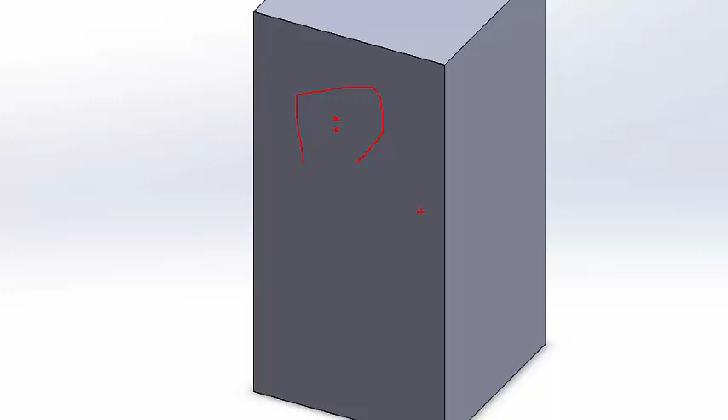Okay, welcome back. Now we are going to add additional features to our base rectangle that we made in the previous tutorial. So what we're going to do in this tutorial is we're going to make the traffic lights shield, the two holes for the LEDs, and then we're going to make copies of them down.

So we put all our work into one light cover and extruded holes. And it's like copying and pasting. And that way we will end up with all three, but put all our work into one.

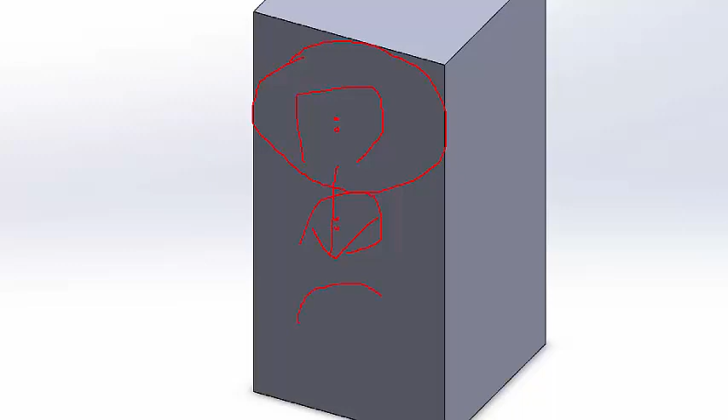Okay, so to do this, what we're going to do is we're going to start with an extruded boss base. Like mentioned before, you never start at the sketch level unless all you wanted was a two-dimensional sketch. We're going to click on the extruded boss.

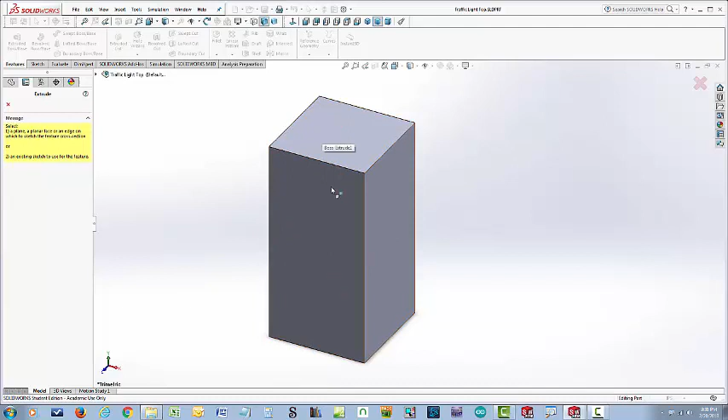This time it doesn't show us planes. It expects us to pick some part of our part. So we're going to choose the front face.

Now when we start sketching on here, we want to choose the front view so we're looking on it straight on.

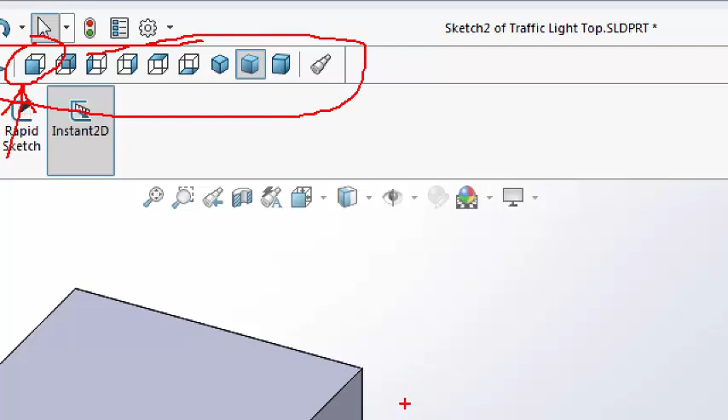So if you don't have this toolbar, what you need to do is when you right click up here, you will then see this menu come down, and the one you want to click is standard views. So if you click that, you will end up with this toolbar here.

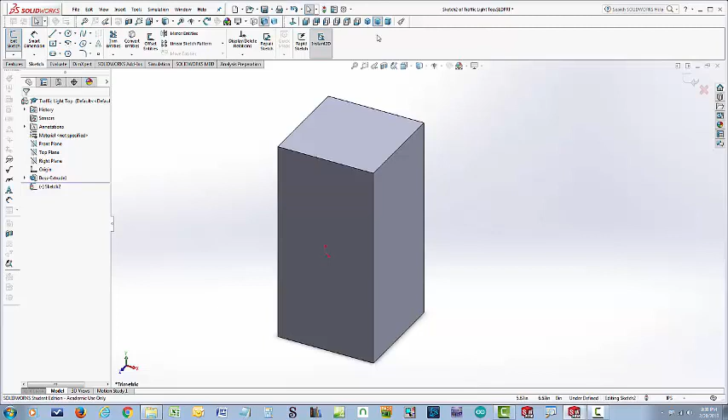So I'm going to click the front, so I'm looking on it straight on. Now I'm going to be using

a center line as a construction line. So I have to click here for the drop down menu because the default is the line, but I want to use the center line. So I click here, drop down menu, and I'm going to select center line.

With that active, I am now in the sketch. I am going to go over here to the, because we created the part at the origin, we now have the origin of our XY axis here in the middle of our part.

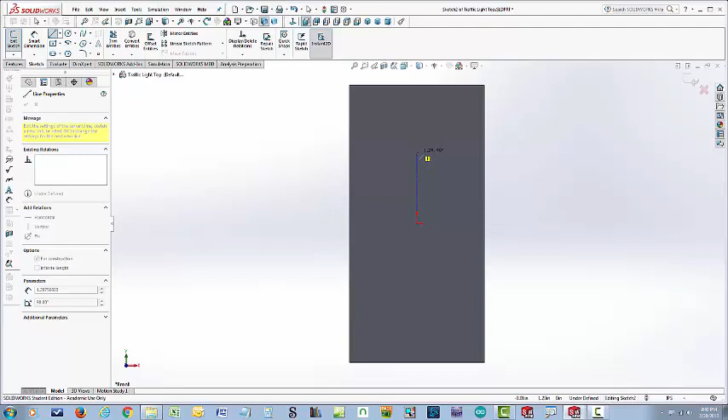So I'm going to click here, I'm going to drag up to about here. Again, I am sketching, I don't care about the dimensions. I'm going to make it look close to what I want it to be. I will then use the smart dimension to actually change this to be the dimension I want.

You'll notice that after I click that, it wants to do another one. I can hit the escape key to terminate, or I can just go over here and I'm going to select a circle, not the perimeter circle, but the circle. And now by doing that, I've switched from the lines to a circle.

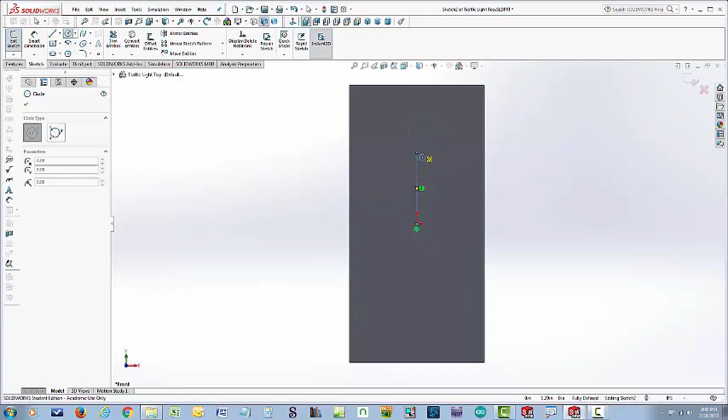And what I want to do is I want to click here and then move my mouse out to create a circle centered on the end of the center line. So I click there, go out, and again, I am just sketching, so I'm going to drop a circle.

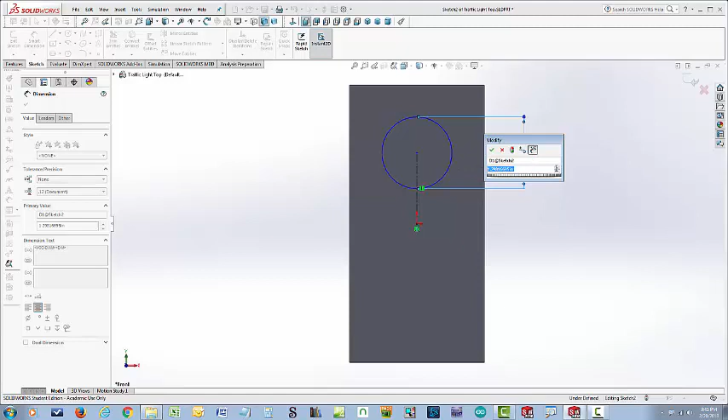Now I'm going to hit Smart Dimension, and when I hover it over the circle and it's orange, I'm going to click and drag to the right, at which point I want my circle to be 1.5 inches. It's 1.5, you can't see it here, but it's 1.5, and then inches.

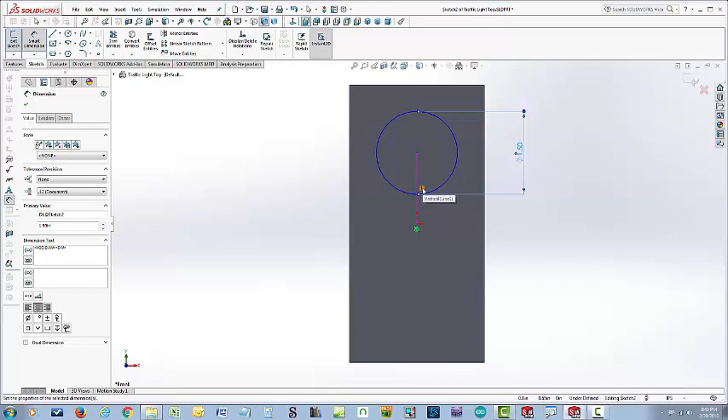Then I'm going to click the check box. Now I'm going to hover my cursor over the center line. I do not want to touch the green boxes or any of these other special marks. I hover over, when it's highlighted, I click, drag over to the left this time. I want also 1.5 inches.

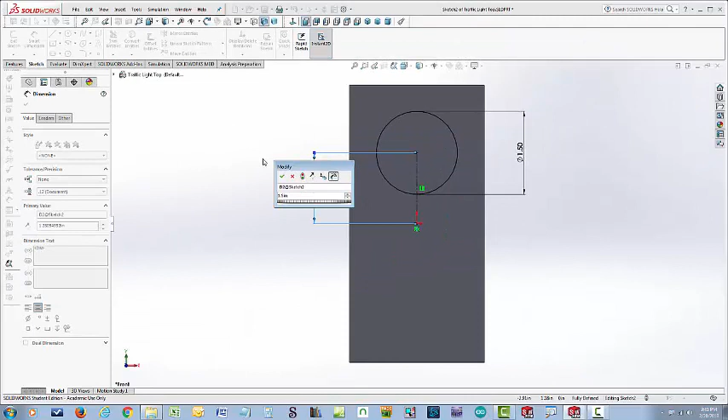For my center line, click the check box. Here I have this. Now I'm going to close out the dimension now.

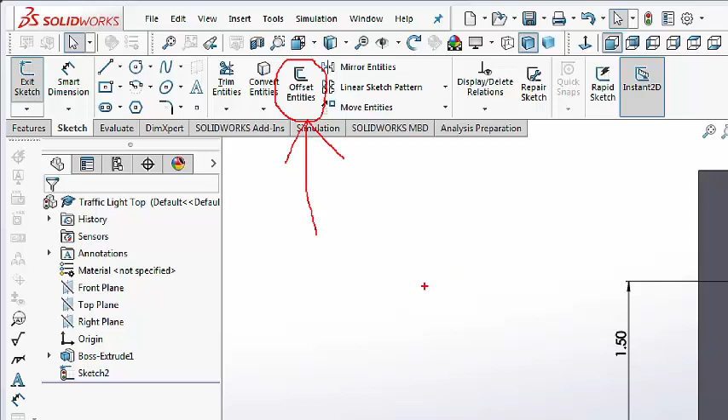I am not going to exit the sketch at this point because I want to extrude this out as a donut. To do that, I'm going to use the offset entities right here. For those that have done the pressure plate tutorial, which you need to do if you haven't, it shows how to use the offset entity so you make a donut instead of just a solid extrusion.

So start by clicking offset entity. We are then going to click the circle. You'll notice the yellow is on the outside. I want the dimension, the thickness of my extrusion to be 0.125 inches. Hit enter.

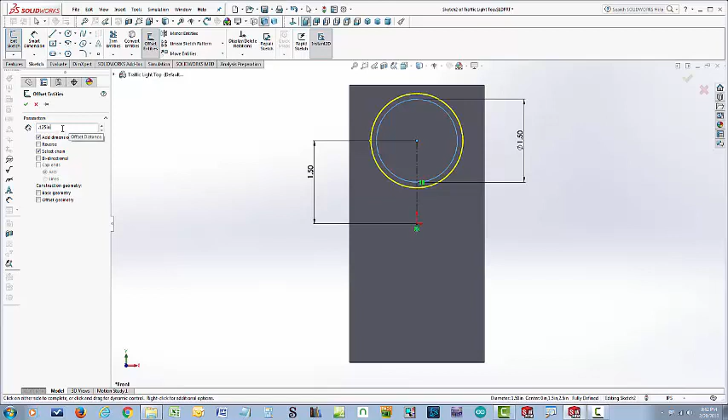You can see the thickness is going to be 0.125 inches, which is 1/8 of an inch. And then we're going to click on the reverse until we get a check mark under reverse. So I'm clicking the reverse. Now I got a check mark.

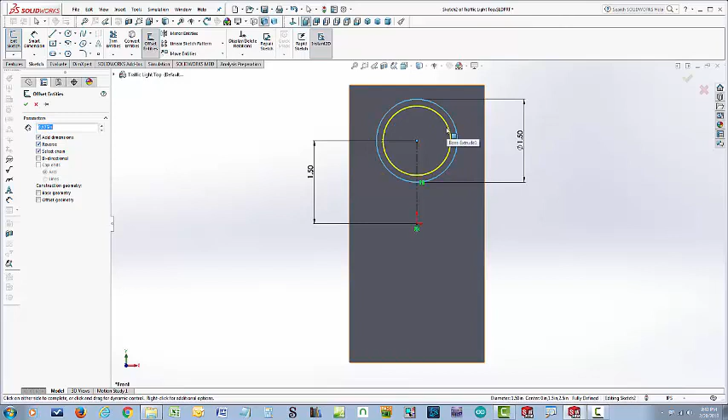You notice the yellow is now not out here but inside. This is needed for you to extrude a donut out. After I've done that, I click on the check mark and I am okay. I've completed the offset entity.

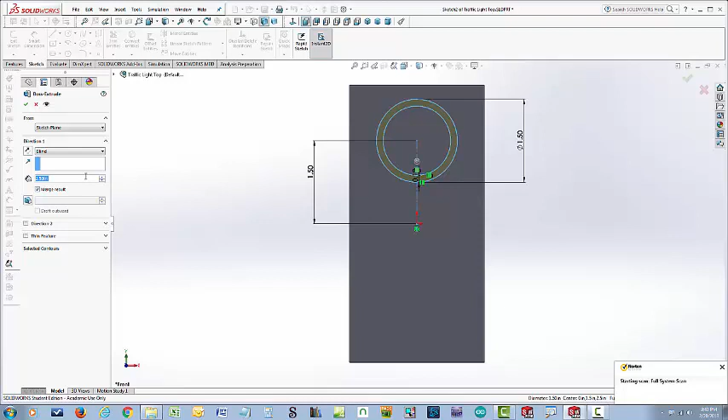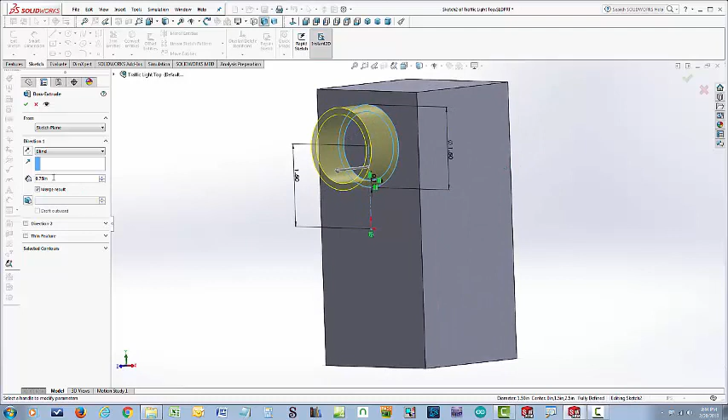Now I'm going to exit the sketch, and it says how far out do you want to extrude. I want to go out 0.75 inches. See? 0.75 inches. If I hit enter, and if I press down the middle mouse key close over here and move it, you can see that it's coming out there. Then I hit the check mark to confirm. So now I have this extruded donut.

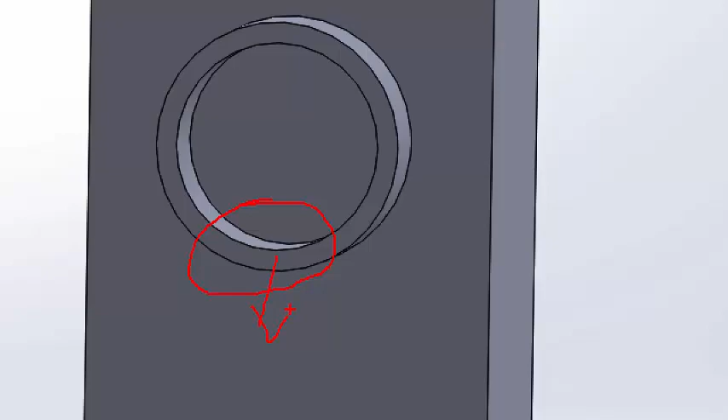But what I want to do is cut some of this out so that the rainwater won't trap here, it'll fall down in real life. So what we're going to do is go to the front view and do an extruded cut.

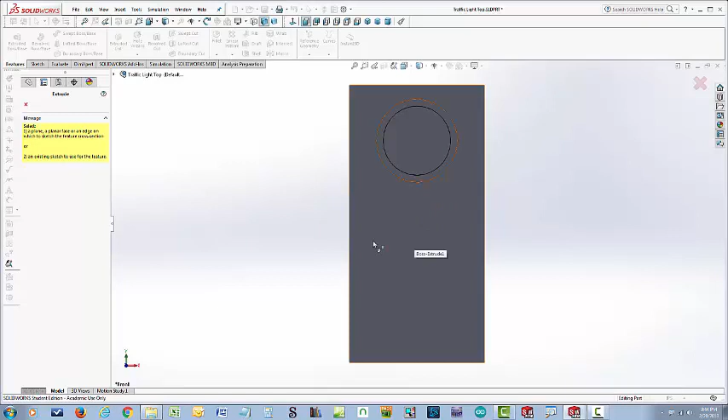Right here, it's in the Features tab. So we're going to click Extruded Cut. It says, what do you want to cut? I don't want to cut on the rectangle, I want to cut on this plane. So I don't want to select the line, I want to select between the two lines. They're both orange. That's where my cut is going to start.

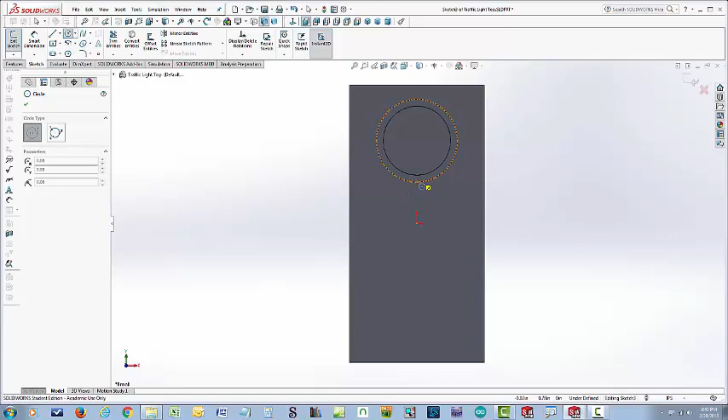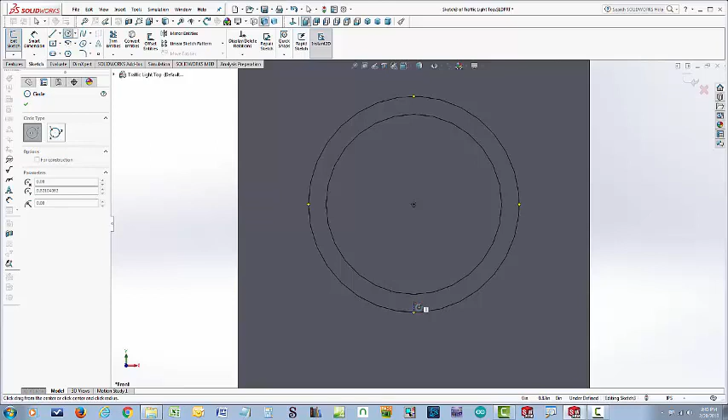And then go down. So then I'm in the sketch, I'm going to select the circle. And then as I zoom in here, you zoom wherever your cursor is, so the middle scroll bar. You notice when you hover over the circle, you get these yellow dots around here. Now I'm going to go over this dot here and go up to the middle point and click and drop a circle. So I went over here, moved up here, clicked, and then made this circle.

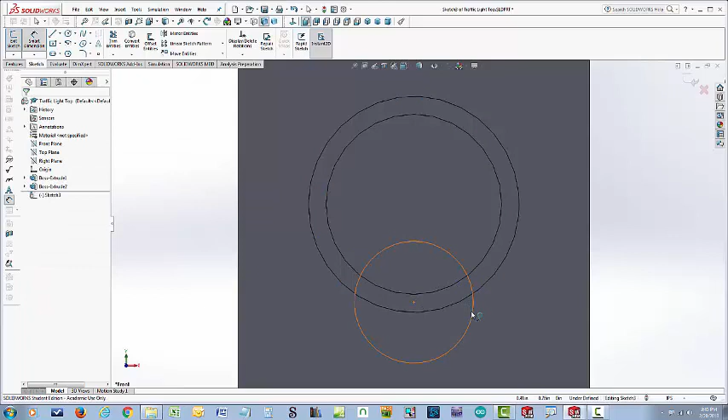Now what I'm going to do is smart dimension that circle, and I want it to be 1 inch, 1 units inch. Check. Now I'm going to close out of the dimension and exit the sketch, and it says how far do you want to extrude cut.

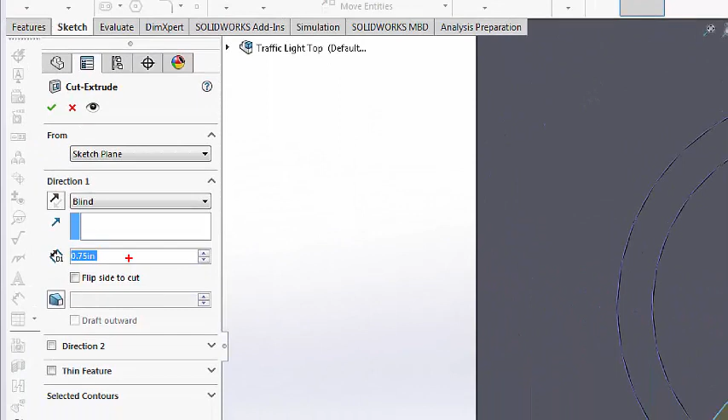Now because we just extruded 0.75 out, it remembers the last thing we did. So in this case we want to go 0.75 the other way. So we leave it there and we just click the check mark. And if you click away and use the middle mouse button, you can see we have our horseshoe.

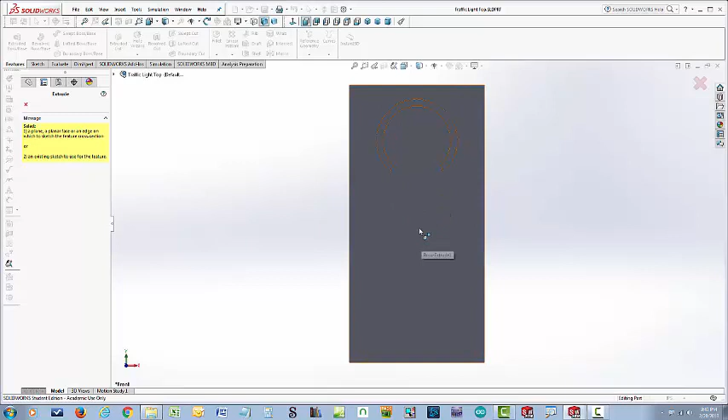Now we want to put 2 cuts in here. We're going to start with 1 cut, and to do that, we're going to click the extruded cut. We want this time the rectangle, so anything on the rectangle, we do not want to select the horseshoe. So now I'm going to put in a center line, but I'm going to zoom in on the horseshoe because I'm not going to be using that axis. So I'm going to zoom in on the horseshoe and use my center line.

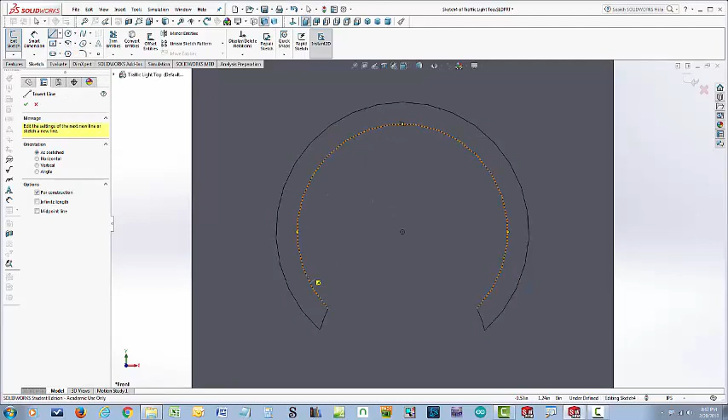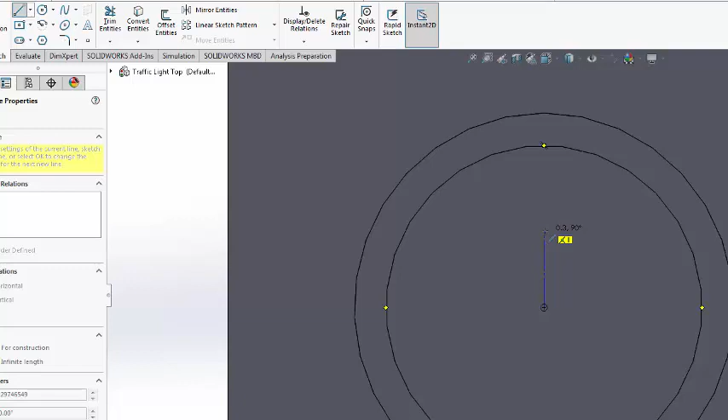Now I'm going to hover over this circle. When I do so, you notice that you get these yellow dots around here, and you also get the center. So I'm going to start my center line here. So with my center line selected, I'm going to hover, then go over the plus, click, and drop a center line there. I am then going to select my circle. Sounds familiar, huh? I'm going to put it at the top of my center line.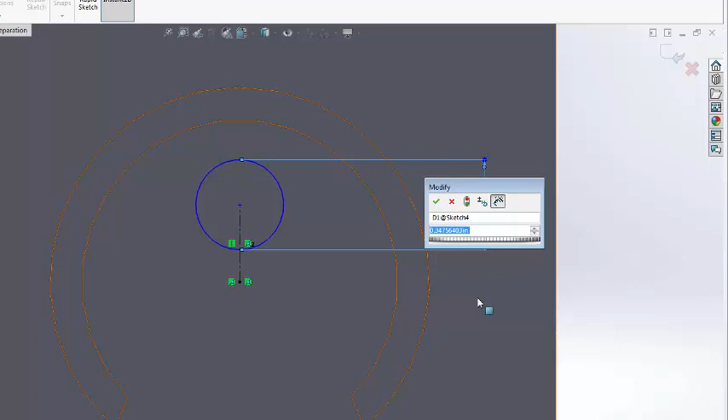I am then going to Smart Dimension. This circle is already selected, so I am just going to drag that, and I want my circle to be 0.0625 inches. That is 1/16 of an inch. And then I'm going to click the check mark. You'll notice it's tiny. This is for one of the leads of our diodes.

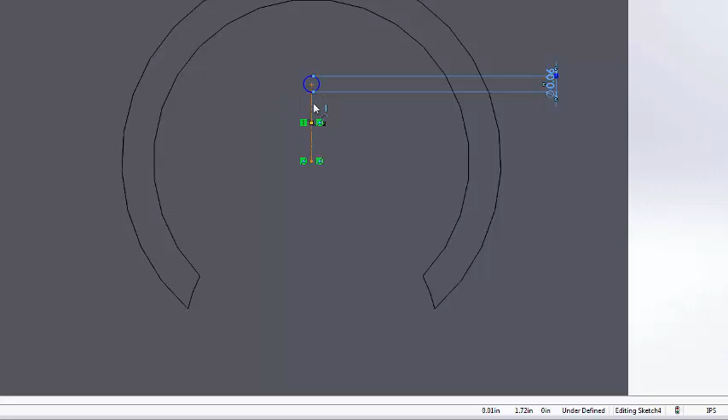Now I'm going to click my center line. I want it also to be 0.0625 inches. So we have our hole a 1/16 of an inch above this middle of the horseshoe.

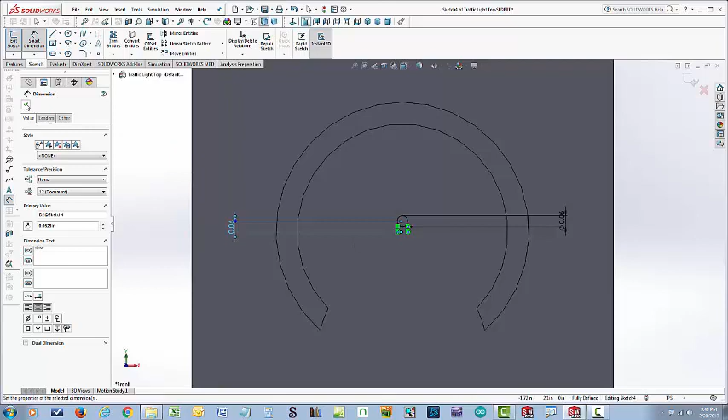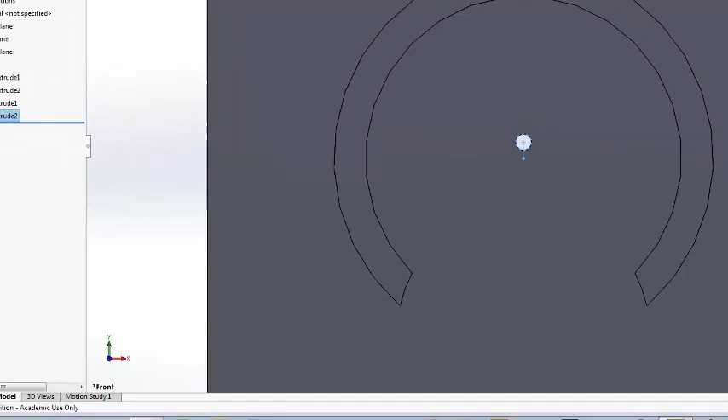I am then going to say exit sketch, and it says, well, where do you want to go? I want to select through all, and this way it'll go all the way through. So instead of blind, I'm going through all. Then I say okay. Now if I click off, you will see the hole goes all the way through. Let me zoom back out here a little bit. You see it goes all the way to the back.

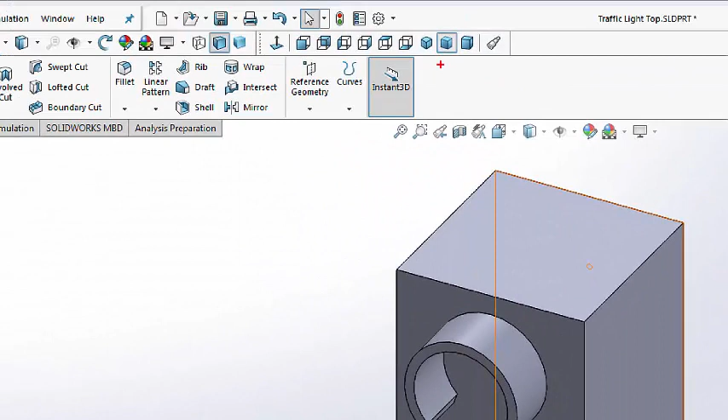Once you've got all this and it's all funky and you want to get back, you just go up here and click Trimetric. That's why this toolbar is very important.

Now I'm going to click the front view, and I notice I have one hole and I want to do another. I'm not going to go through and do an extruded cut because that's a lot of steps. If I have something I want to copy, the way you can do it is with this linear pattern right here.

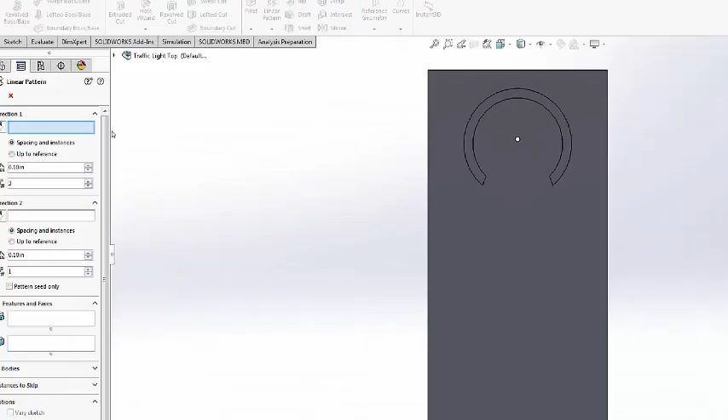So I'm going to click linear pattern, and then it wants to know by this blue box what direction you want to go in. So we're going to click on one of these vertical edges. I'm going to just click that one. You will notice the direction is down, which we want.

If it was up, we would have to click here to change the direction. Okay, so our edge 1 right there is the right direction. We're not doing direction 2.

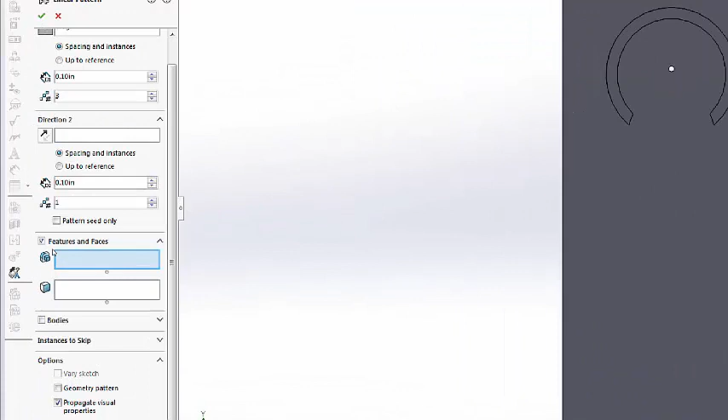Then under Features and Faces, you want to click it so that it is blue, ready to receive input. So what we're going to do is up here - this is called a flyout. Now it's in the minimal position. We want to click on this to expand all the items that are in it.

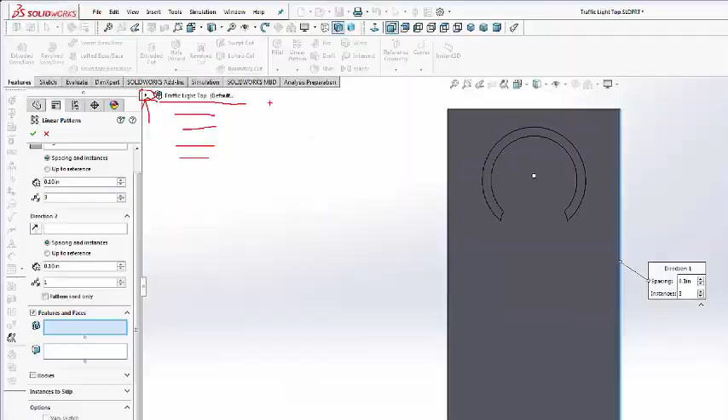So by clicking it, this has all of the features in our property tree that we've made, and we're going to use these selections for our feature faces instead of clicking out here. So we're going to click on the cut, and you can see it says cut extrude 2. Now the pattern number here is 3, we want 2.

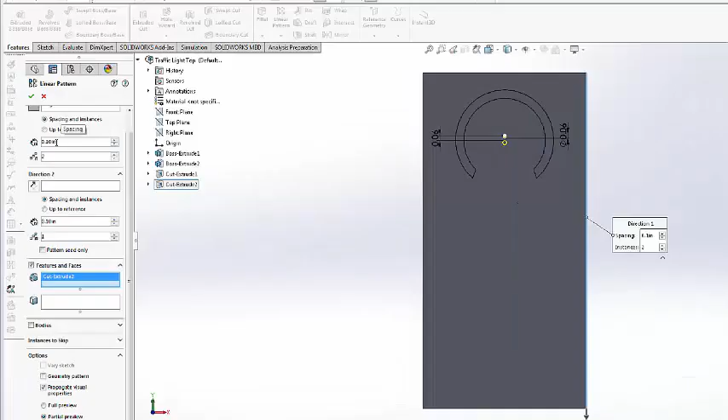So we want 2. We're going to use these up and down arrows to do that, and then we want this to be 0.1... 0.125. We're not going to use these, we're going to type it in.

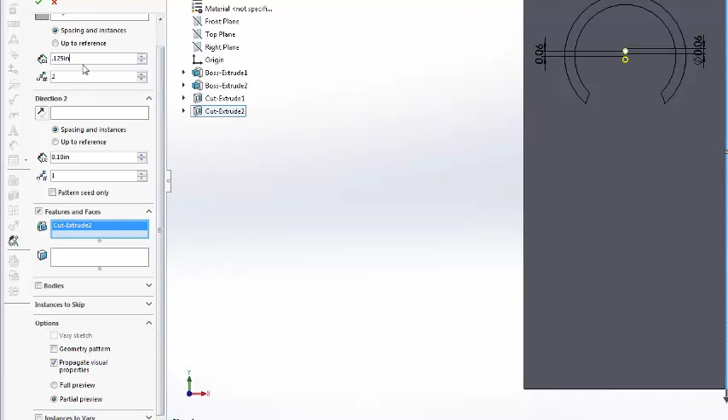And then so we want to select it, 0.125 inches. That is 1/8 of an inch. So if I am, and hit enter.

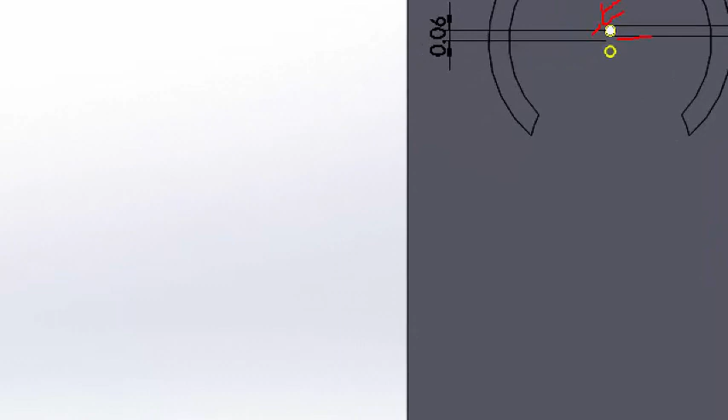So what was happening here is this hole is a 1/16 of an inch above this line, and I want it to be 1/16 of an inch on the other side. So a 1/16 here and a 1/16 here is 2/16, which is 1/8, which is 0.125, which is what we're putting in here. Then we say OK, and we notice that now we have the other hole.

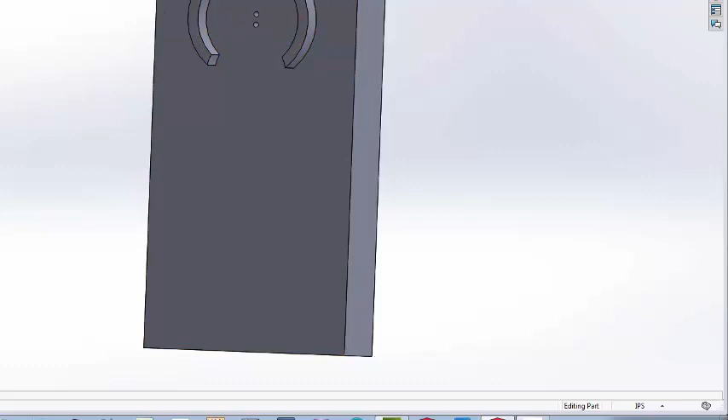Now we have one completed horseshoe. Then we're going to go trimetric, and we're going to hit the save button.

Now, instead of making the horseshoe and these holes again, we are going to do a linear pattern on all three of these objects to go down and make our life easier.

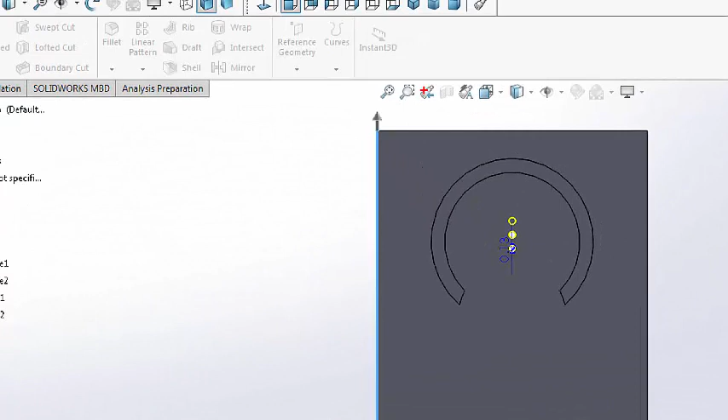So we're going to start with the linear pattern again. We need to know the direction. I could pick this edge as well. Now you notice that the arrow is going up. I don't want to go up, I want my pattern to go down.

So I have to click in this box under direction 1 to make it switch directions. So I will click in there, and now you notice the arrow is going down.

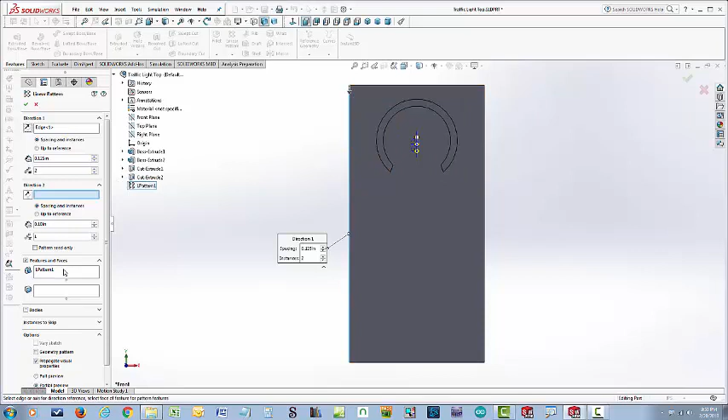Now we're going to click on features and faces. It has the linear pattern we did before. We're then going to add the extruded cut, 1 and 2, and the boss.

Okay, so you notice those 4 features are in the faces. So when you select things here, they're added - when we have this highlighted and active, it transfers these into our features and faces for us.

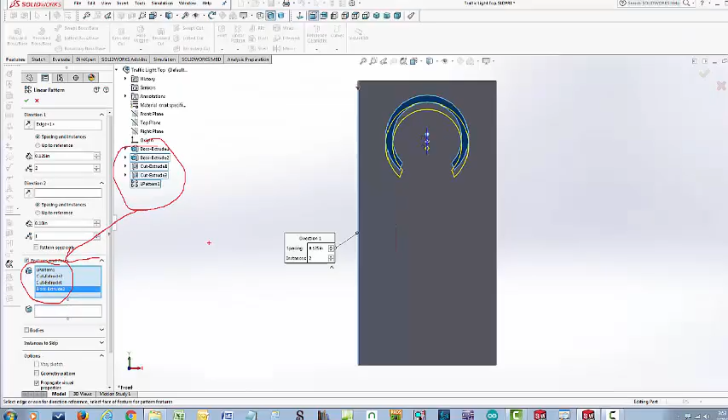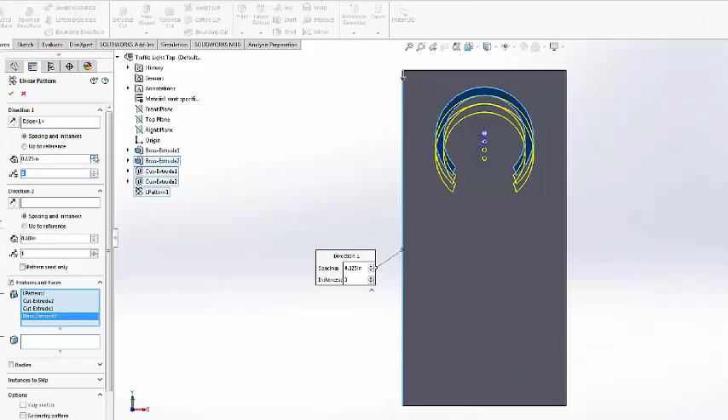We now want to go up to these areas here. We want to make that a 3, and we want to make this 1.5 inches. Using the arrows up, it's 3. Now you can tell when you click on this up arrow, it increases these in small increments.

And you can see the pattern moving over here on the object, but we want it to be 1.5 inches. Enter.

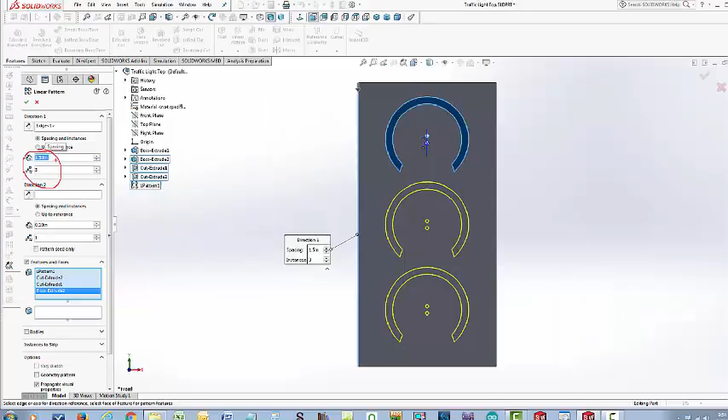So we want this, and then we get this pattern here repeated 2 times down there, right? And then we're going to click OK, and we now have all of the top lights.

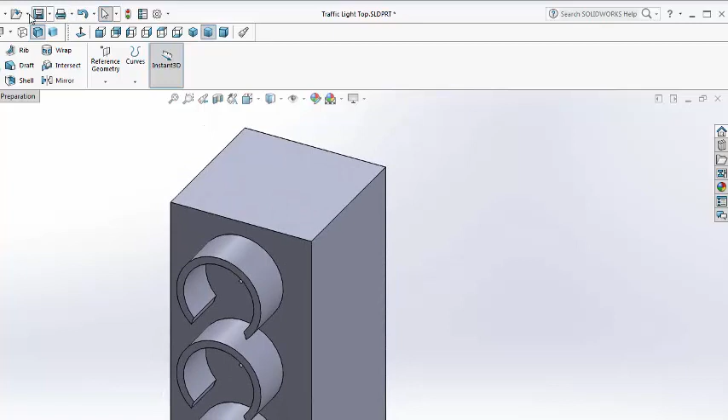So then what we're going to do is hit save and trimetric display, and this ends this tutorial on the traffic light top lights.